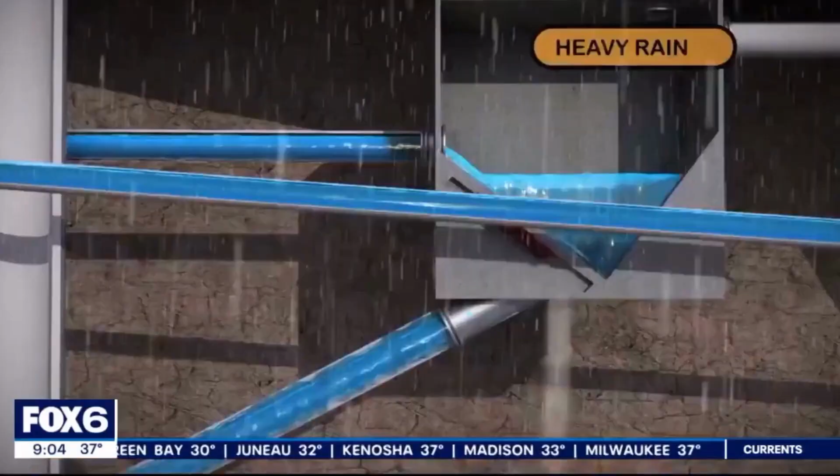To help prevent homes and businesses from backing up, MMSD started a combined sewage overflow. Public Information Manager Bill Graffin says when the deep tunnel fills up, a relief valve sends untreated water and raw sewage to rivers that then flow into Lake Michigan.

The Mississippi River is a 2,340-mile-long river that is the habitat for more than 100 various species of freshwater fish and more than 400 different species of wildlife, and also has a long-standing history as a source of drinking water and transportation. Where the Mississippi runs through the Twin Cities, it provides drinking water for more than 2.5 million Minnesotan residents, which is 44% of the population.

The river is also often used for agricultural, industrial, and recreational purposes. However, the water quality of the river has majorly declined through the decades due to storm and wastewater management problems, introduction of invasive species, contamination from farmland and residential areas, and poor erosion control.

Throughout the 1900s, one of the most important of these factors was combined sewage systems, or CSSs. Combined sewer systems are sewer systems in which untreated residential and industrial sewage and stormwater runoff are collected into the same pipe and sent to wastewater treatment facilities.

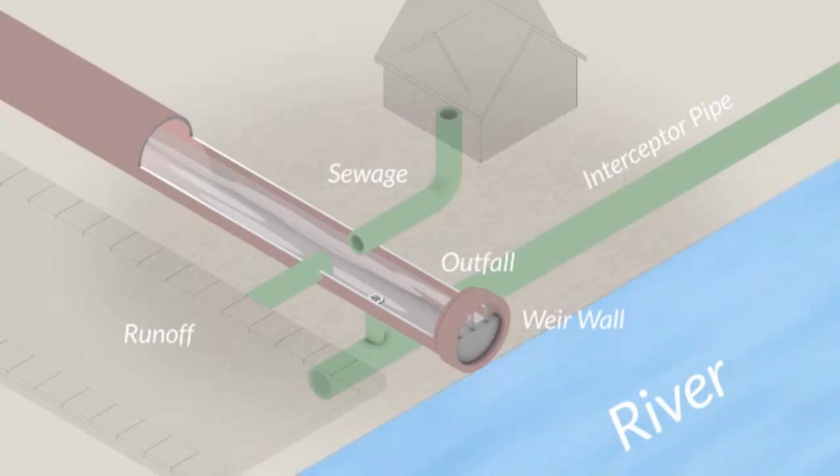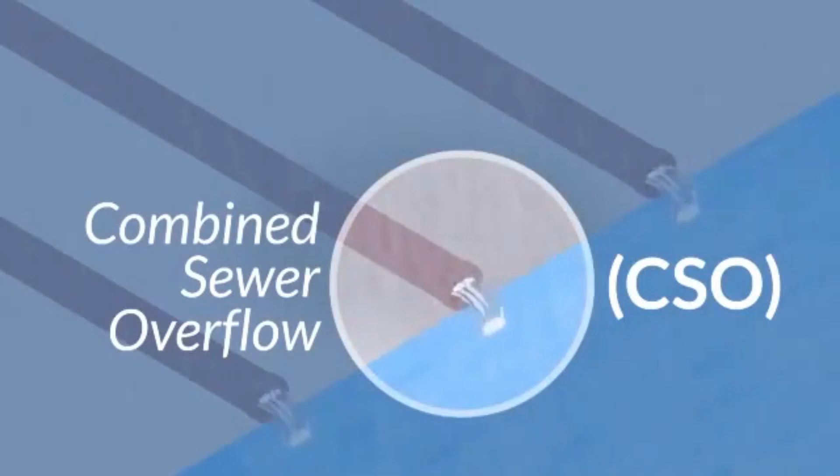However, as urbanization became increasingly prevalent during this time, the amount of sewage increased, and during instances of heavy precipitation or snowmelt, the pipes reached their capacity, causing combined sewer overflows, in which the overflow in the pipe flows untreated into a waterway. In the case of the Twin Cities, this waterway was the Mississippi River.

Such instances polluted the river with contaminants and sludge from the stormwater and the untreated sewage, majorly impacting the water quality. This quickly turned into a public health concern, with aquatic life drastically decreasing.

In response, in 1933, the Twin Cities developed the sanitary district, and in 1938, they established Pig's Eye Sewage Treatment Plant, treating wastewater with chlorination before dumping it into the Mississippi River. From 1930 to 1950, the quality of water within the Mississippi River improved.

However, by 1955, the population of the Twin Cities dramatically increased, and the amount of sewage being handled at such facilities was simply not enough to accommodate the amount of sewage being produced, meaning more raw sewage and stormwater runoff was dumped into the river.

Despite such efforts to develop more treatment plants to respond to declining water quality, due to the prevalence of the combined sewage systems, during large precipitation events, CSO events still occurred, polluting the Mississippi River. It was not until 1960 that the Twin Cities attempted to directly address this issue, and the separation of the sewage system and stormwater pipes began.

These CSO events had major effects on the quality of the water in the Mississippi River because untreated sewage combined with stormwater runoff and was dropped directly into rivers and streams. Combined sewage overflows contained untreated human waste, industrial waste, and stormwater, which all have potential contaminants that can damage water quality.

Some of these contaminants include surfactants, which decrease the surface tension of the water and cause foaming. Another type of contaminant is fecal coliform, which reduces dissolved oxygen levels, endangers aquatic animal life, and indicates the presence of disease-carrying pathogens.

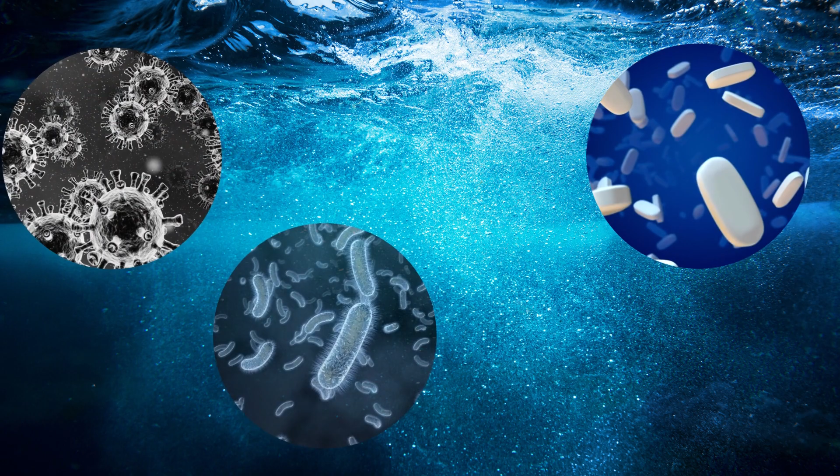Viruses, protozoa, and even pharmaceuticals can be found in CSOs and cause adverse human health effects as well, such as hepatitis, gastroenteritis, and skin, ear, and respiratory infections.

A 1986 study found caffeine levels between 20 to 300 micrograms per liter, which mobilizes toxic metals from sediments and stimulates algae growth. All of these pollutants contributed to the deterioration of the water quality in the Mississippi River and endangered the people of Minneapolis who relied on the river for drinking water, as well as the many organisms that reside there.

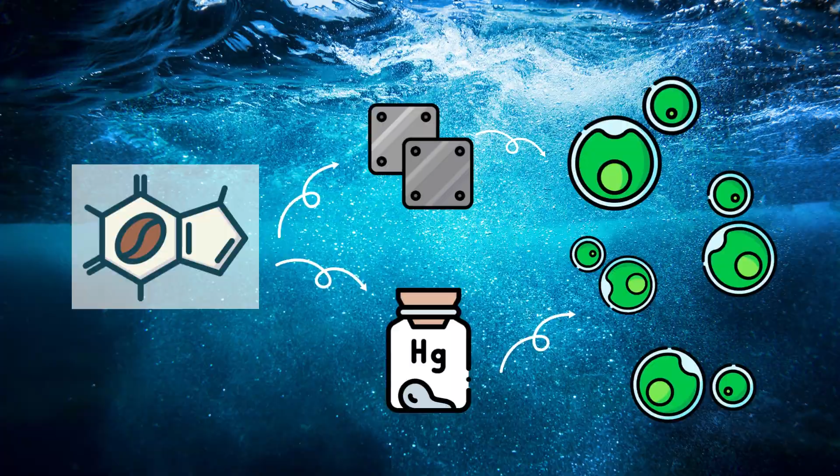We are standing outside of the Twin Cities Lock and Dam. This dam was created in 1917 by the U.S. Army Corps of Engineers. After its construction, the water became more stagnant above the dam, which caused the concentration of contaminants to become much higher.

The contamination was so bad, the U.S. Department of Health had to warn people and their livestock to stay away from the river. As the river was full of sludge, there was a smell, and it was discolored. This prompted the creation of the Minnesota Sanitary Sewer District.

Nevertheless, by 1928, 3 million cubic yards of sludge had been deposited into the river, and the Mississippi River became filled with floating islands of sewage and scum, and typhoid fever outbreaks were common because of contaminated drinking water.

The number of combined sewage overflows increased even further with the urbanization of Minneapolis and St. Paul in the 1960s, as paved surfaces such as sidewalks and roads prevented water from being absorbed into the ground, increasing the amount of stormwater being drained into the sewer system, causing further backups into residential basements and into the streets. The need for change became apparent, and separation was finally started in the Twin Cities.

This is a sample that we took today from the Mississippi River. As you can see, 100 years later, after decades of work to separate the combined sewer systems, the water's now clearer than ever, and the ecosystem has been revived to the state it was at before the 20th century.

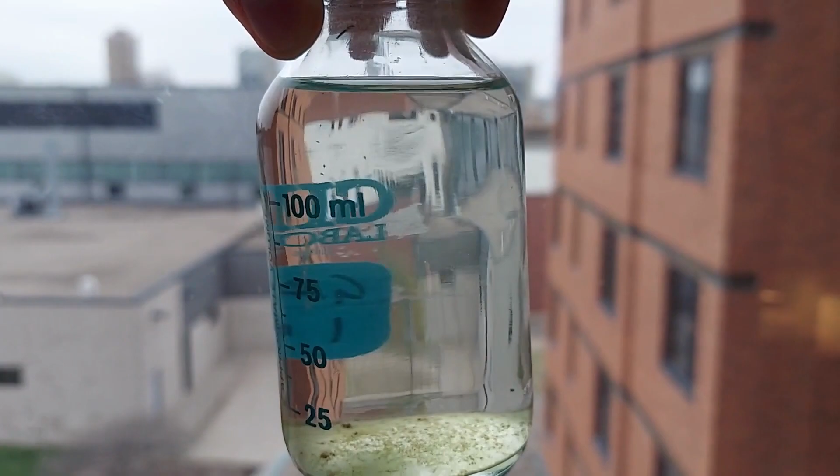All of these programs work to monitor the quality of water in lakes and rivers throughout the Twin Cities and to monitor the city's use and treatment of this water, building and improving upon the extensive combined sewer system separation process that they completed throughout the second half of the 20th century that resulted in the clearer, healthier water that is seen in the Mississippi River today.

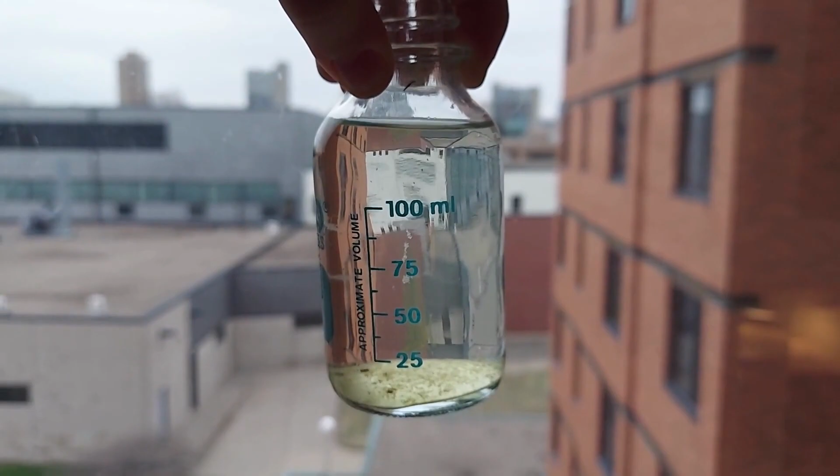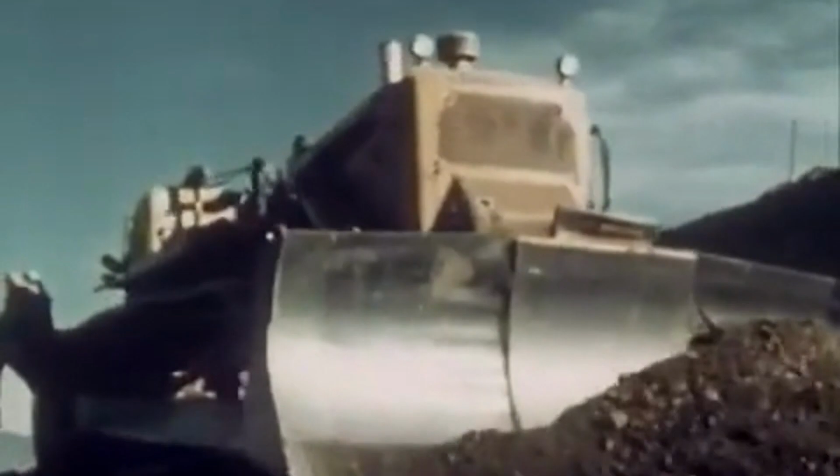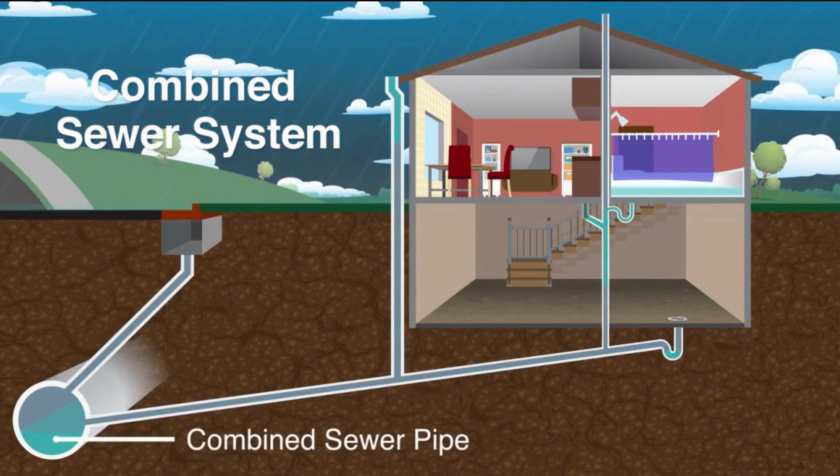They utilized the project to also begin constructing separate stormwater pipes and reconnect the city's sewage and stormwater runoff to these separated pipes, beginning the separation process of more than 4,600 acres of the city served by the combined sewers. Still facing CSO problems due to the increase of paved surfaces in the Twin Cities however.

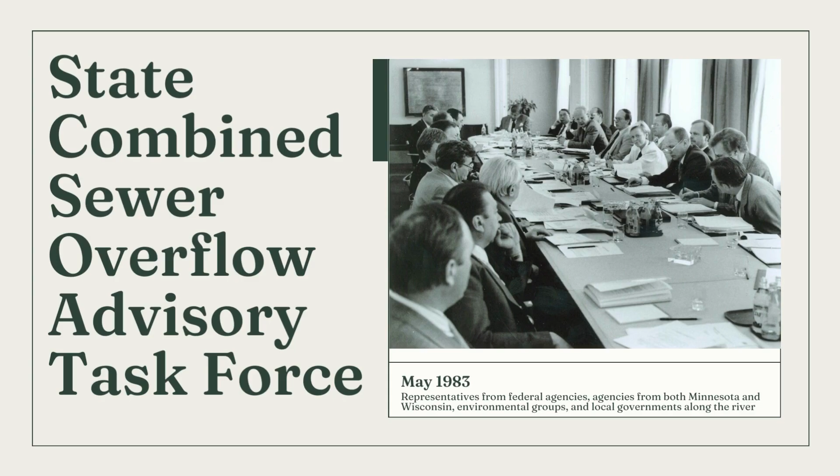In May of 1983, the MPCA commenced an advisory group called the State Combined Sewer Overflow Advisory Task Force to tackle the problem head-on. This task force, made up of representatives from federal agencies from both Minnesota and Wisconsin, environmental groups, and local governments along the river, were responsible for addressing the prevalence of CSOs in the Twin Cities and determining the most appropriate solution to prevent another CSO event.

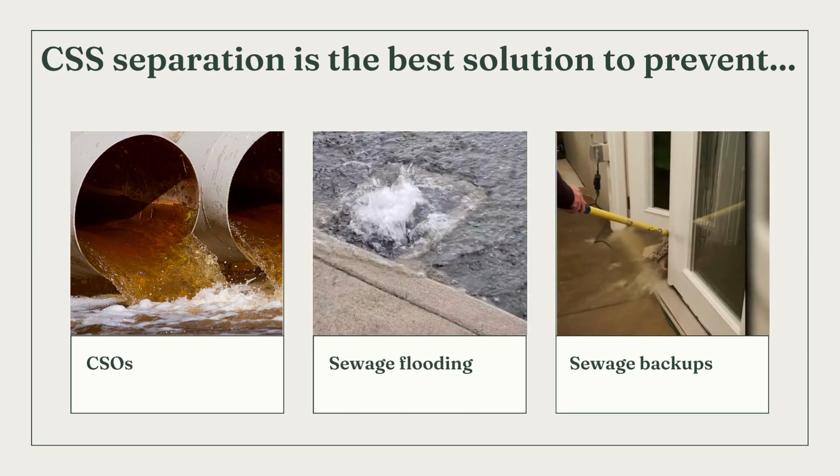The task force had monthly meetings until October of 1985, whereupon they came to the conclusion that CSS separation was the most appropriate and economical solution to subside CSOs, sewage floodings, and sewage backups to improve the water quality of the Mississippi River.

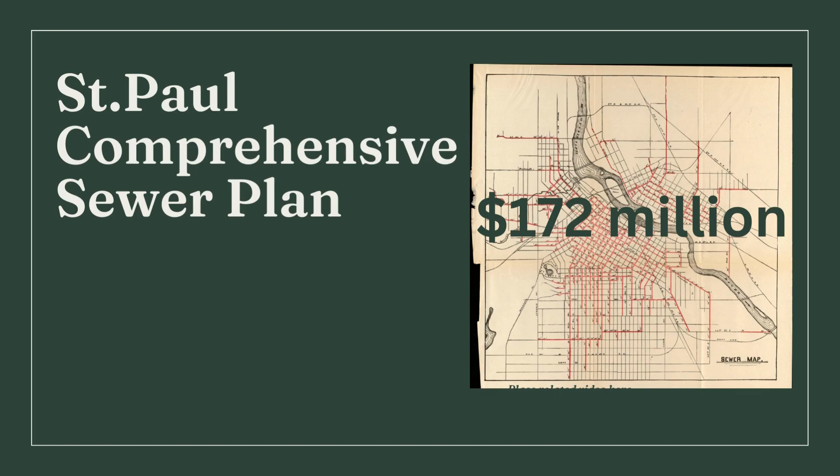Following the task force decision and recommendations, St. Paul established the $172 million comprehensive sewer plan for the city of St. Paul to be completed by 2025, with the goal of eliminating CSO events and sanitary backups, increasing the system's capacity for sanitary sewage, and reducing sewer service charges by the MWCC by eliminating the treatment of stormwater.

During the time this plan was established, however, engineers within St. Paul estimated that approximately 4.6 billion gallons of raw sewage and stormwater runoff had overflowed into the Mississippi River annually from the Twin Cities, with discharges taking place approximately every 3 days.

This encouraged the development of an accelerated joint 10-year, $332 million CSO control program for Minneapolis, St. Paul, and South St. Paul. The goal of this plan was to eliminate sewer backups in basements and implement infrastructure improvements.

These include street paving, street light installation, tree planting, gas pipe repair, and water service replacement. The plan also minimized traffic congestion and disruption of utilities while coordinating with neighborhood street paving, utility work, MNDOT's construction programs, and MWCC's CSO and lake overflow projects.

Through this program, they were able to install 189.1 miles of storm sewers, install 11.9 miles of sanitary sewers, pave 168 miles of streets, plant 11,000 trees, and disconnect more than 21,900 residential and 6,140 non-residential rain leaders, which led stormwater from gutters and downspouts to the sewer system.

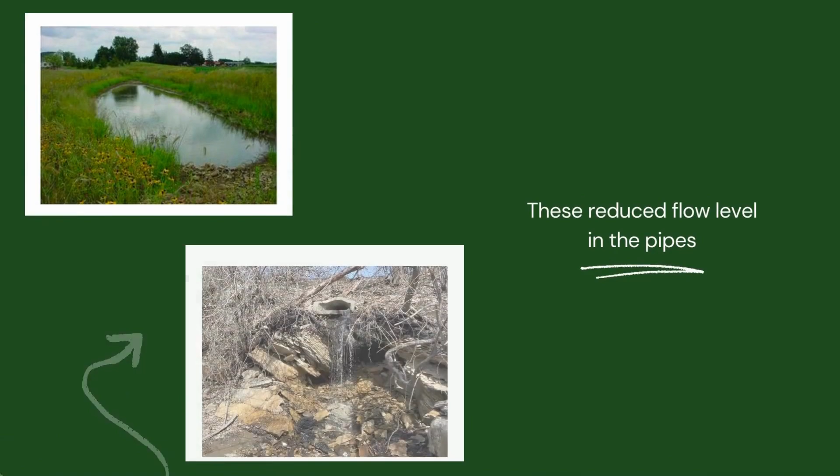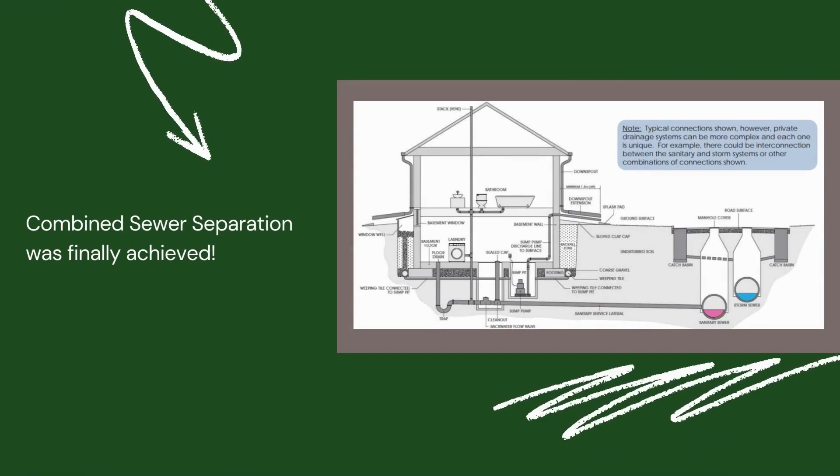This program also worked to eliminate 26 of the 34 CSO areas in Minneapolis by 1996. The remaining 8, due to their age, were more challenging, both physically and economically, to identify and separate. However, after multiple intensive projects, which consisted of the creation of stormwater ponds, outlets, and storage tunnels to help reduce flow levels in the pipes, these remaining CSOs were separated.

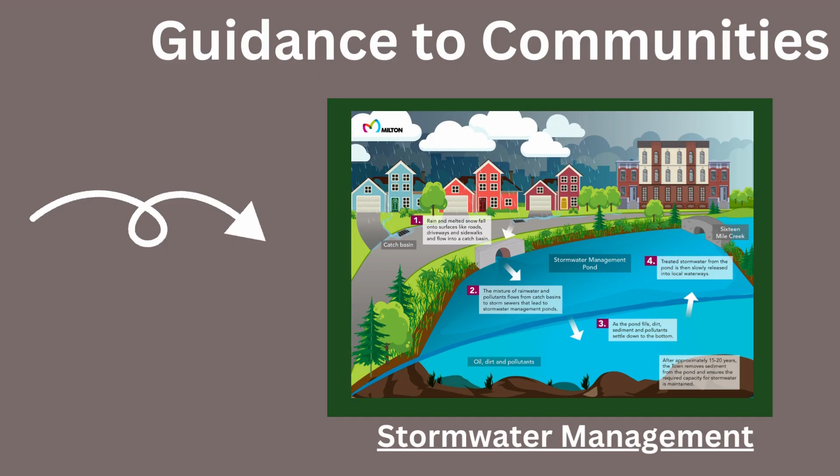helping to close out the process of combined sewer separation in the Twin Cities. Since then, the cities have continued to work to improve sewer processes and structures, and in 2002, a study was completed on the sewers which identified remaining CSO sites and helped the Metropolitan Council and the city of Minneapolis provide guidance to communities, which recommended rain leader and area drain disconnection, drainage system improvements, community education program, and stormwater management practices to minimize runoff and pollution in waterways from both public and private property.

Because of this work, there has not been a CSO in Minneapolis since 2010, which was not due to a traditional capacity issue of the pipes, but rather due to the collapse of a wall in the infrastructure of the pipe. And 8 years later, in August of 2018, the Twin Cities initiated their CSO permit termination.

This permit, known as the Joint Federal National Pollutant Discharge Elimination System and State Disposal System, had initially been issued in 1984 by the MPCA and EPA and reissued in 1986, 1991, and 1997. It was a permit developed under the Clean Water Act with the purpose of acknowledging the existence of the CSO problem and instilling penalties if a CSO occurred in the cities.

This permit was supported by the Joint Integrated MS4 permit held by the City of Minneapolis and the Minneapolis Park Board, which is a municipal stormwater permit that focuses on drainage systems from roads, curbs, gutters, ditches, channels, storm drains, and streets, and reducing the entrance of sediments and pollutants into the state waters from stormwater drains.

As a part of this termination plan, MCES and Minneapolis and St. Paul specifically defined their responsibilities in regards to connected infrastructure before applying for the joint permit termination, which was then solidified and officially terminated by the MPCA and the EPA.

In an interview with Kyle Colvin, manager of the wastewater planning and community programs at the Metropolitan Council, it was explained that the availability of funding for improvements was the primary driver for the Twin Cities separation process.

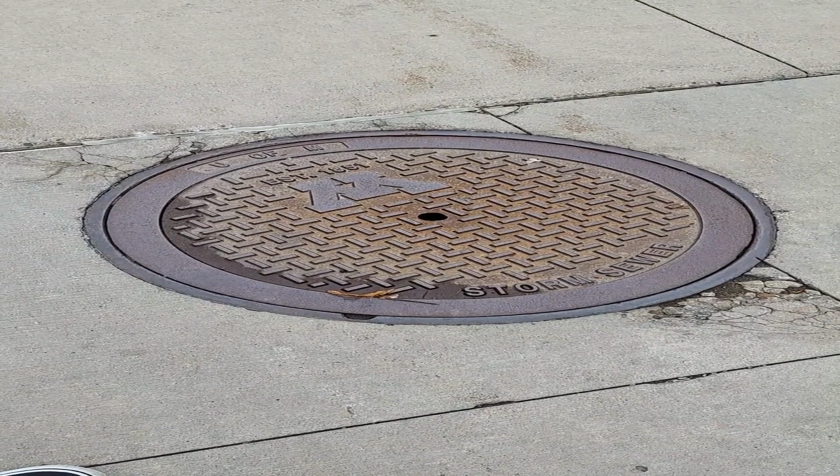Colvin explained that in the 1960s and 1970s, there was a lot of federal money available in the form of grants and loans for infrastructure improvements, such as highways and sewers. He said that the local municipalities in Minnesota took advantage of this money to its fullest extent and immediately put it into action, resulting in the separation process previously explained.

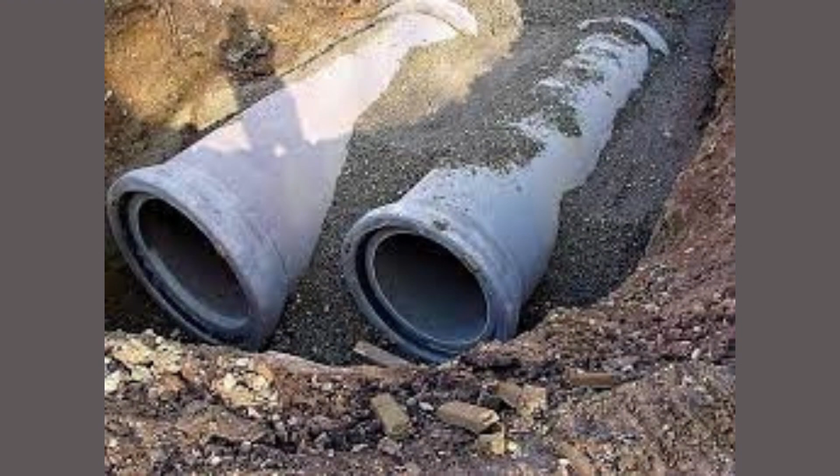Colvin further specified the separation process and its benefits, noting how the separation process was the best option for the Twin Cities, because it resulted in the construction of a separate secondary sanitary line right next to the initial CSS pipe that would take in residential and industrial wastewater and direct it to a wastewater treatment plant, leaving the older, larger pipe for stormwater to flow to the Mississippi, increasing stormwater capacity.

This was especially important because as urbanization increased throughout the 20th century, so did the amount of impervious pavements of parking lots and sidewalks, increasing the quantity of stormwater runoff.

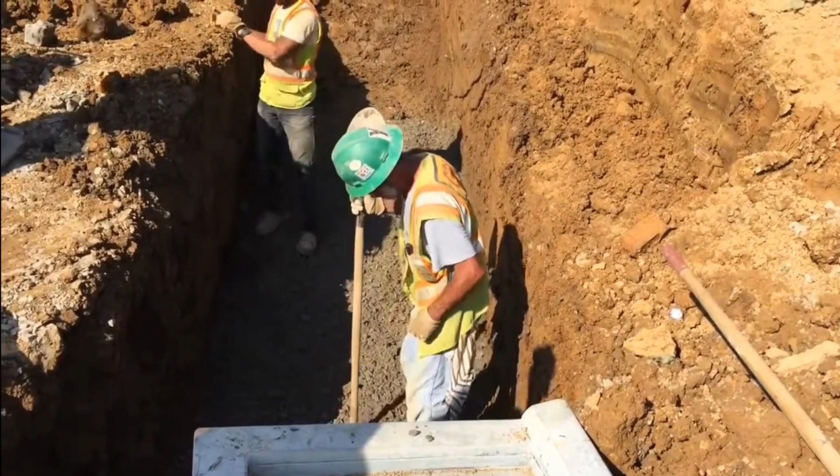Colvin also explained how the sanitary pipes were newer and tighter, and were made with rubber gasket joints that prevent groundwater from coming into the system, reducing both the loss of groundwater and the inflow of water into the sanitary pipes that does not need to be treated.

The extensive separation of the sewage system in the Twin Cities has for the most part made combined sewage overflows a problem of the past. However, stormwater and sewer problems are far from over, and there are still efforts being made by the Twin Cities to ensure contamination is reduced as much as possible.

such as the great deal of integrated work being done throughout the city, which combines improvements such as light rail planning, stormwater tunnel construction, and integration of hydraulic and water model layering, to continue to prevent overflows and improve the quality of water within the Mississippi River.

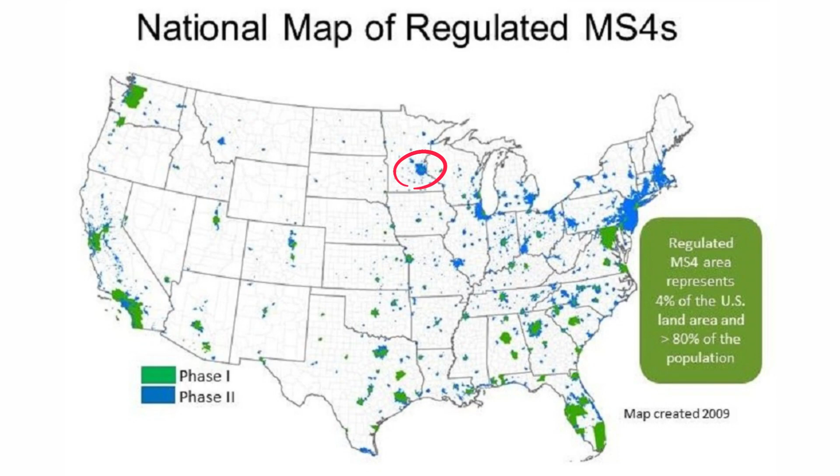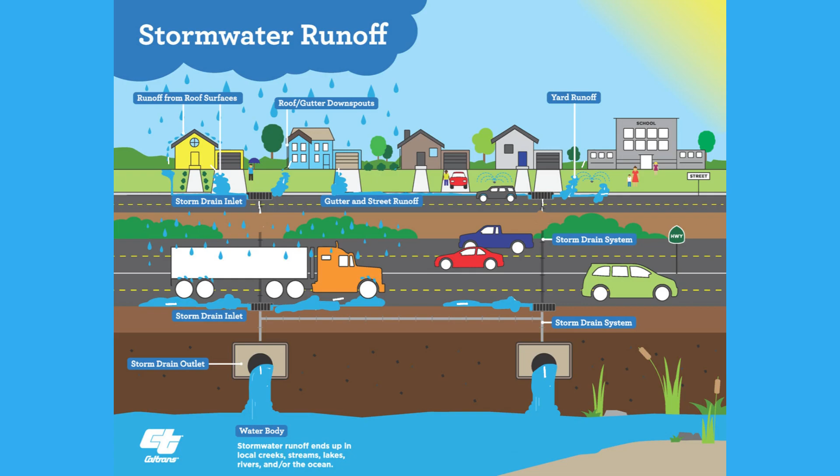According to Kelly McIntyre, senior professional engineer for the city of Minneapolis, today stormwater runoff and stormwater system capacity are still challenges being addressed through the integrated MS4 National Pollutant Discharge Elimination System permit and through the flood mitigation and storm tunnel programs. Stormwater runoff occurs when rain and snowmelt run over the many hard surfaces in urbanized areas, such as roads, sidewalks, and driveways, and pick up pollutants, such as pesticides or road salts, and enter into storm drains.

The storm drains, called MS4 drains, deposit directly into nearby water sources, bringing pollutants to lakes, rivers, and streams. The MS4 permit for the cities aims to reduce the amount of sediment and other pollutants entering Minnesota waters through the development of a stormwater pollution prevention plan that addresses public education, outreach, and participation, eliminates illicit discharges and construction and post-construction site runoffs, and emphasizes the inspection and maintenance of infrastructure.

Minneapolis also implemented the I&I mitigation plan in 2018 to reduce inflow and infiltration in the sewage system through rehabilitation and repair projects. Inflow is when stormwater enters the sewers through roof drain downspouts, foundation drains, storm drain cross connections, and through holes in manhole covers, while infiltration is when groundwater enters sewer pipes through holes, cracks, joint failures, and faulty connections. In either case, clean water gets sent to treatment plants, lowering the capacity for wastewater in the sanitary sewage system and wasting money on its treatment.

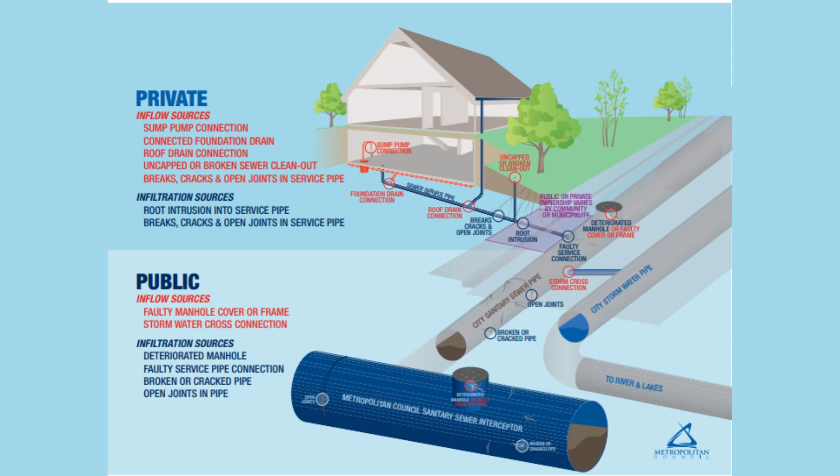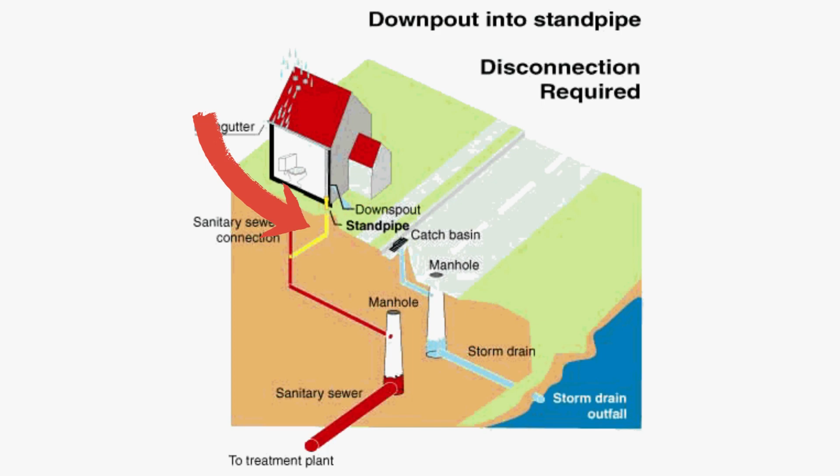One of the main sources of inflow is rain leader violations, which is when the rain leader is connected to the sanitary sewage system instead of the stormwater drainage system, causing combined sewage overflow. Currently, 7,331 out of 7,560 rain leader violations have been resolved.

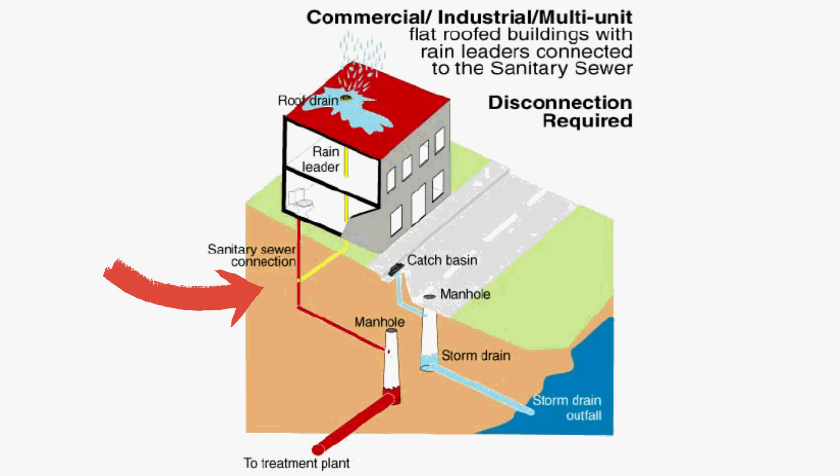A sanitary tunnel and sewer rehab program is also in place to repair aging or damaged sewer infrastructure. The cities are working with communities to set personalized limits for inflow and infiltration, to invest in I&I mitigation on private and public properties, and to report violations to the MPCA so that they can fine property owners and further encourage them to address the issue.

According to McIntyre, another way in which the Metropolitan Council of Minneapolis is trying to address inflow and infiltration is through their I&I surcharge program, which focuses on reducing peak flows from I&I that would require the MCES to construct additional capacity, by billing communities an additional wastewater charge if they exceed the max levels of I&I set by the Metropolitan Council Environmental Services.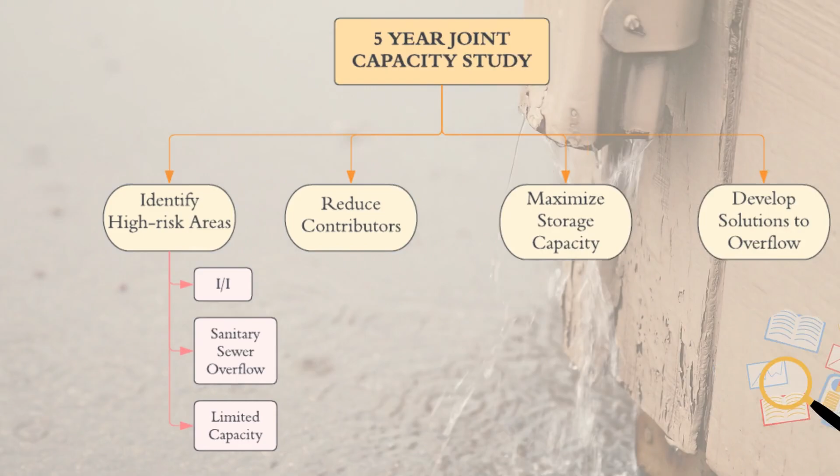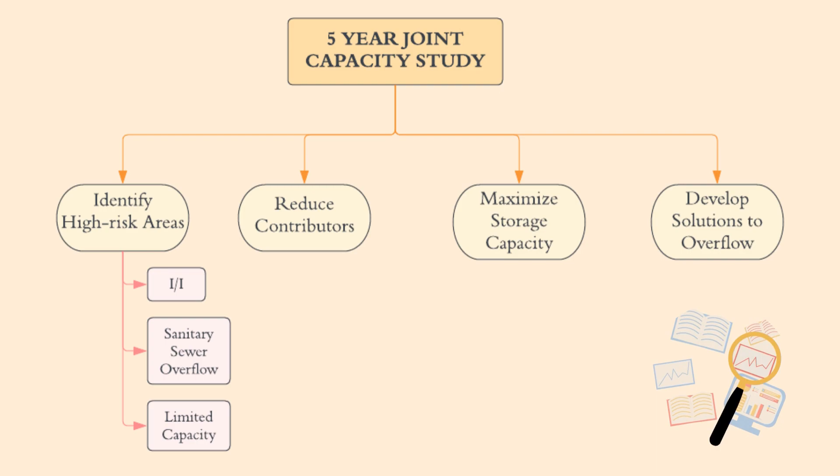MacIntyre also explained how the Metropolitan Council and the City of Minneapolis are working on a 5-year joint capacity study of the regional wastewater system within Minneapolis, which focuses on identifying areas that are at high risk for I&I, sanitary sewer overflow, limited hydraulic capacity, and limited storm sewer system capacity, and working to reduce contributors and maximize storage capacity while developing cost-effective solutions that reduce the risk of sanitary sewer overflow.

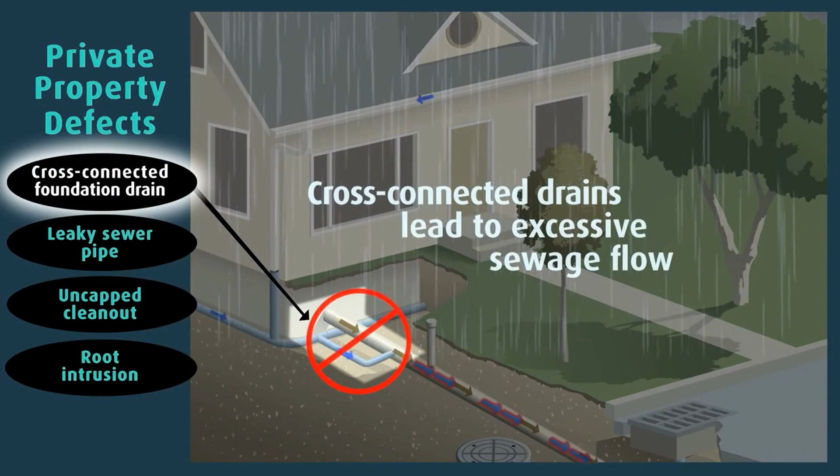Despite these improvements, MacIntyre and her colleague, Walter Atkins, another engineer for MCES, identified that there are still improvements that need to be made, particularly related to private property. Without financial assistance to private property owners, the city has experienced difficulties trying to decrease I&I on private properties, unlike municipalities which have continuously worked on public infrastructure as it has aged.

I&I was also brought up in the Metropolitan Council's Climate Action Plan, as they are trying to evaluate the impacts of climate change on inflow and infiltration to the regional wastewater collection system and develop recommendations to respond accordingly, as climate change has resulted in an increased number of heavy precipitation events that cause the groundwater table to rise, increasing infiltration into the system, reducing its capacity.

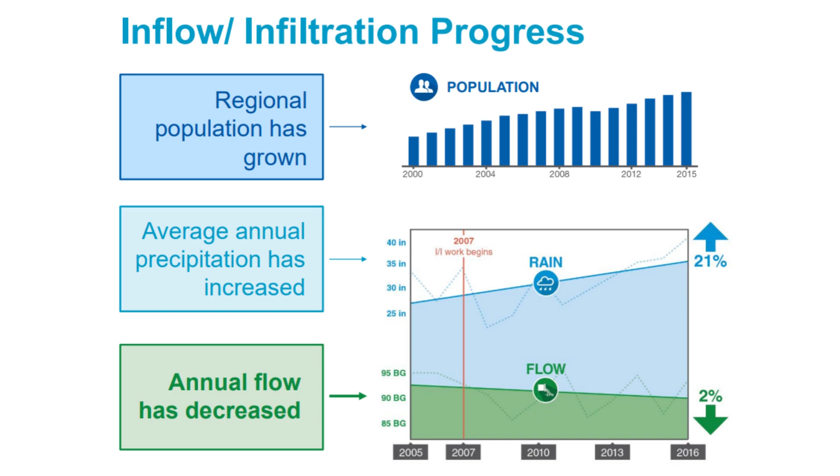Due to the Twin Cities' continued work, I&I flow has decreased by 2% since 2005, even as annual precipitation increased by 21% and the Twin Cities experienced substantial population growth.

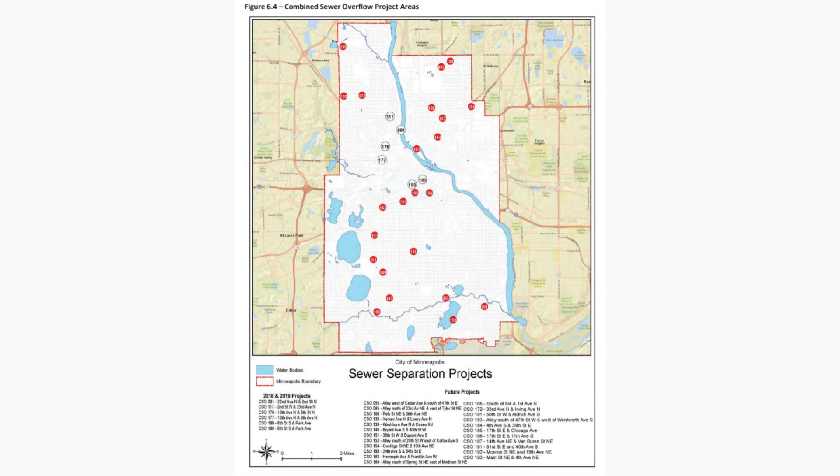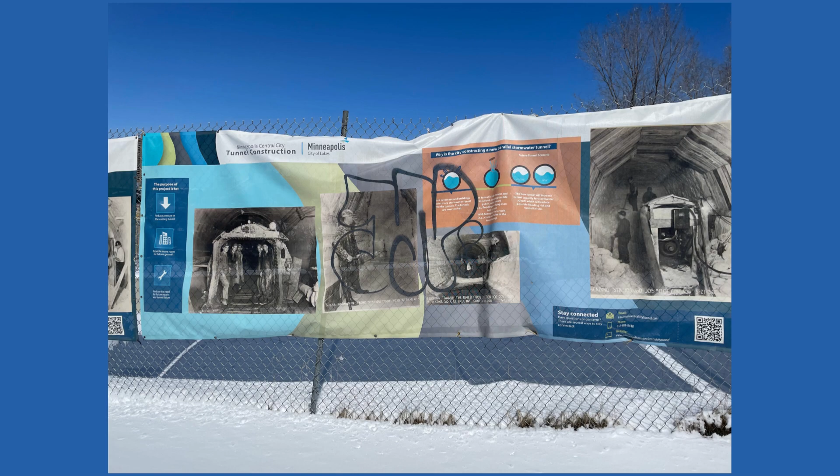Another prominent example of continued sewer and I&I improvement and mitigation is the CSO 005 Combined Sewer Overflow Improvements Project. Started on January 1st, 2022, the project is expected to end on December 31st, 2027, after removing the direct inflow of stormwater to the sanitary sewer system and redirecting it to the storm drain system where necessary. This project will reduce the amount of clean water in the sanitary sewer system and lower the risk of overflow.

Right now, we are outside of a construction site that is part of the CSO 005 project. They are building an extra stormwater pipe to account for the increased amount of stormwater runoff due to increased impervious surfaces.

Despite these continued concerns, as mentioned previously, sewer separation in the Twin Cities marked a turning point in the water quality of the Mississippi River in the area. This makes the Twin Cities an excellent model of how a metropolitan area efficiently tackled this long-established environmental problem.

Currently, in the U.S., it is estimated that more than 700 municipalities, such as Chicago, Milwaukee, Cincinnati, Boston, New York City, St. Louis, Kansas City, and others, still have combined sewer systems, most of which still experience frequent combined sewer overflows that spill anywhere from 1 to 14 billion gallons of sewage and stormwater overflow per year. Technologies and plans exist throughout the country to try to remediate these issues.

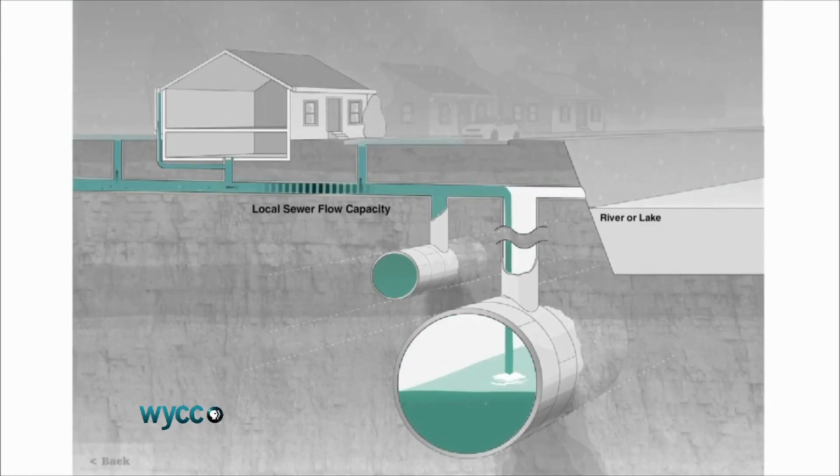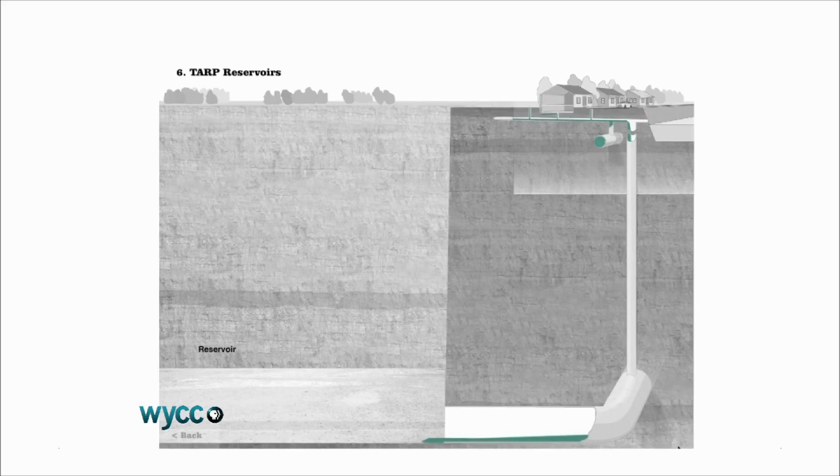One such example is the Metropolitan Water Reclamation District of Greater Chicago's Tunnel and Reservoir Plan, or TARP, which works to collect highly polluted sewer flow that exceeds the capacity of the sewers during wet weather and store it until it can be pushed back into treatment facilities, providing an additional 6.5 billion gallons of storage for intercepting sewage water.

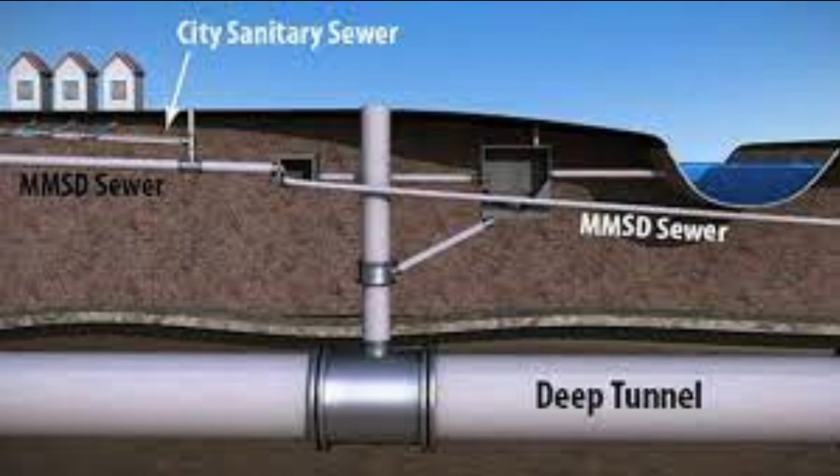A similar example is that of Milwaukee's deep tunnel system, which stores excess wastewater from CSSs underground in a 28.5-mile-long tunnel until wastewater treatment plants can handle the flow.

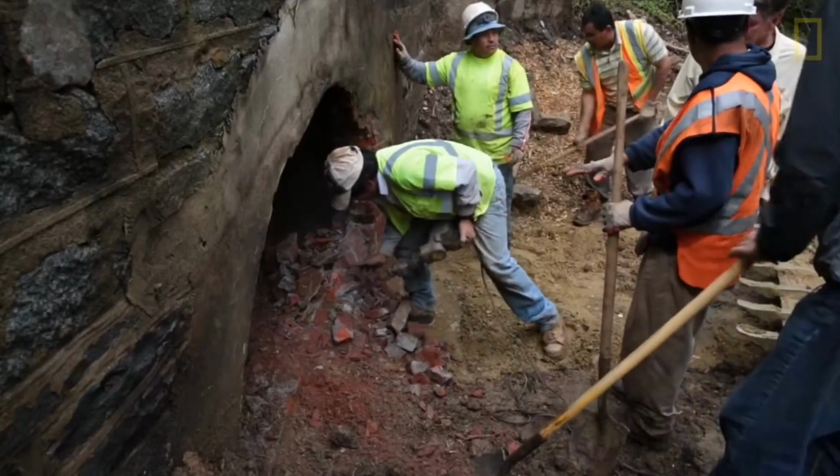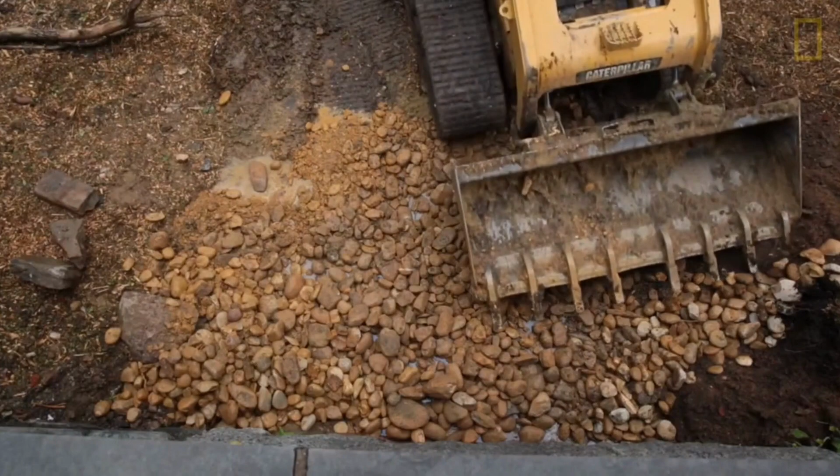Furthermore, in Cincinnati, the Metropolitan Sewer District is working on a plan called Lick Run Watershed Strategic Integration Plan, part of a larger plan called Project Groundwork, which would focus on reducing stormwater entering the combined sewers by building new storm sewers, restoring streams, forming new stormwater detention basins, creating bioinfiltration gardens and bioswales, and daylighting 3 streams that will be able to take up runoff.

However, while these projects are important landmarks in these metropolitan areas' work towards eliminating CSOs, they still do not fully bridge the gap. Despite Chicago's TARP plan, since the beginning of 2021, Chicago has still experienced 138 CSOs, ranging from 30 seconds of overflow to 19 hours of overflow.

Similarly, although Milwaukee's deep tunnel system has cut CSOs by 96%, they still frequently have to open the gates for overflow, such as their most recent event between February 27th and March 1st of this year, releasing 230 million gallons of water. Cincinnati also still experiences overflows and will even after Project Groundwork is complete.

As one of the top 5 cities in the United States for CSOs, Cincinnati experiences 14 billion gallons of overflow per year, and though Project Groundwork strove to cut at least 2 billion gallons of CSOs by 2018, that still leaves 12 billion gallons unaccounted for.

Furthermore, many of these plans and technologies used by other metropolitan districts only provide temporary solutions, as CSO storage facilities, such as Chicago's TARP plan and Milwaukee's deep tunnel system, have limited capacity and run the risk of becoming septic, corrosive, toxic, and flammable if the wastewater is held underground too long during events of high precipitation and snowmelt.

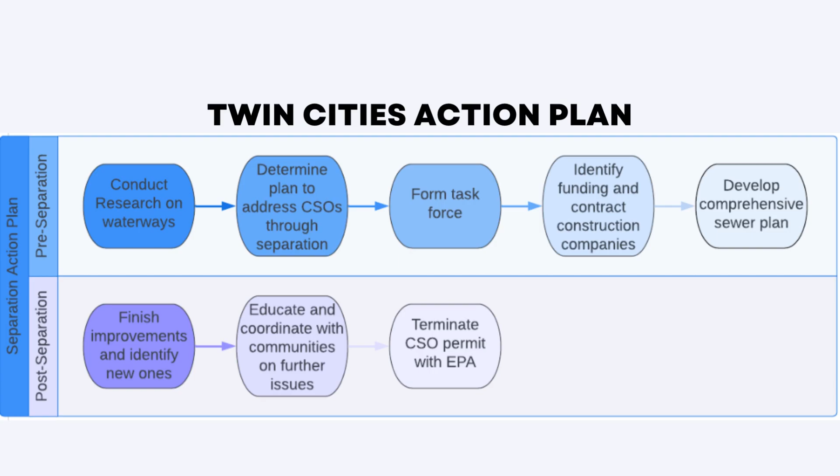Step 1. Conduct studies and research to survey the levels of pollution and contaminants in waterways due to CSOs. Step 2. Work with federal, state, and city governments, environmental organizations, and local communities to determine the best plan for going about CSS separation.

Step 3. Form a task force consisting of people from major organizations of interest to address CSOs directly. These organizations of interest could be federal agencies, state governments, local government representatives, environmental groups, etc.

Step 4. Identify funding sources. These can include federal grants, financing partnerships, pay-as-you-go programs, or joint federal, state, city funding.

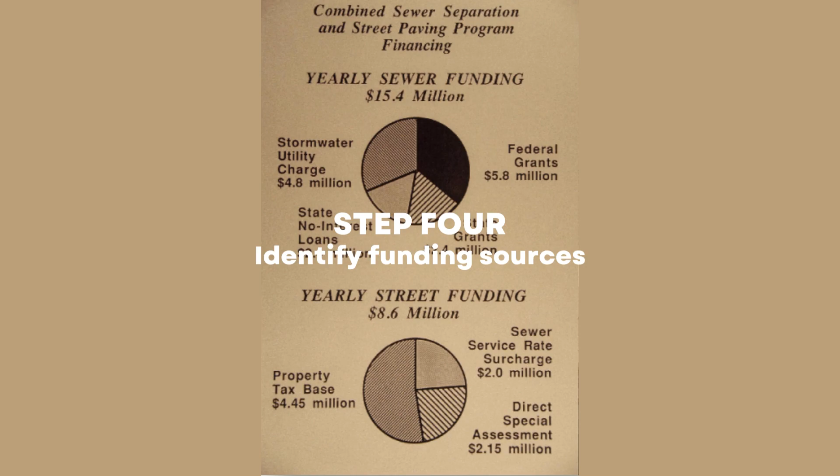Step 5. Consult and contract construction companies. Step 6. Develop a comprehensive sewer plan. This plan would identify key areas of construction, funding sources, and community engagement.

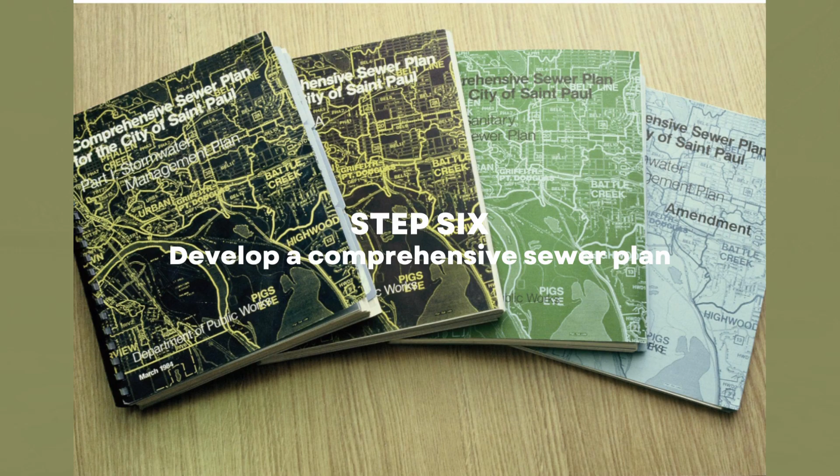Step 7. Execute plan. Step 8. Finish sewer separation, and identify and make plans for future improvements to address further issues.

Just because the CSO issue is taken care of does not mean that there is still not work to be done. Inflow and infiltration and stormwater runoff are still major issues that must be addressed even after CSOs are handled, meaning that a long-term plan should be developed to identify and improve these issues.

Step 9. Coordinate with and educate communities about how they can work to remediate stormwater and wastewater issues locally. This can be through classes for homeowners, rebates, PSAs, or other programs. Step 10. Officially terminate the city's CSO permit with the EPA, declaring that they no longer experience CSOs.

Through this Twin Cities action plan, other metropolitan areas can go about the process of CSS separation and officially end CSO events. Despite high upfront costs for separation and continued concerns regarding stormwater and runoff pollution, as a result of their in-depth methodology and the complete separation process, the Twin Cities has not experienced a CSO event since 2010, which occurred not because the tunnel's hydrologic capacity was reached, but rather because the tunnel's infrastructure itself failed.

Every metropolitan area across the U.S. can utilize the Twin Cities as the prime precedent of not only how CSOs can be addressed, but how a long-standing environmental issue can be tackled efficiently to begin providing a brighter future for both our communities and our environment.